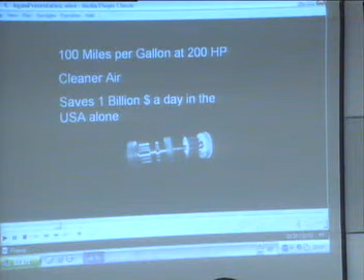Agam's liquid ring rotating casing heat engine: 100 miles per gallon at 200 horsepower. Cleaner air, saving $1 billion a day in the USA alone. Road efficiency of the piston engine has not changed since 1908 and remains at only 10%.

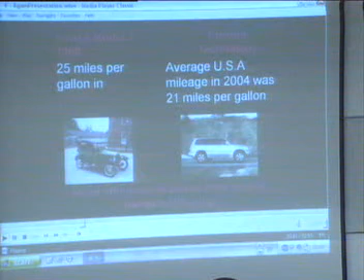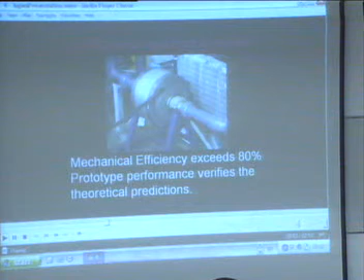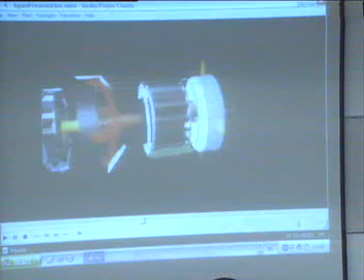The LRRC compressor and turbine are the key elements for new generations of vehicle heat engines. The proof of concept shows that mechanical efficiency exceeds 80%. Compressed cold air on the left is heated by exhaust air on the right before entering the combustion chamber, where its temperature is elevated. Heat is transmitted to the cold air through a thermal liquid pipe connection.

Agam's engine is 5 times more efficient and environmentally friendly. Agam is the future of vehicle engines: 100 miles per gallon at 200 horsepower, in 2012.

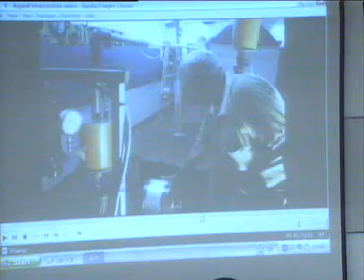Agam heat engine, proof of concept. This is the advanced liquid ring compressor with rotating casing.

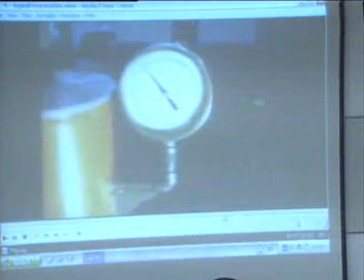The efficiency of this compressor is 82%, compared with 40% for a conventional liquid ring compressor. With 82%, we can build a heat engine with an efficiency of 55%. This is the base for our heat engine.

Agam heat engine is 5 times more efficient than a standard piston engine: 1/5 fuel consumption, 1/10 air pollution.

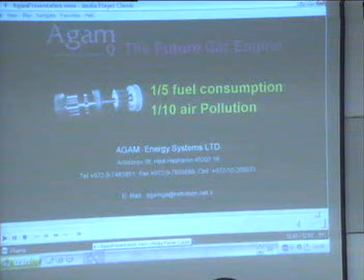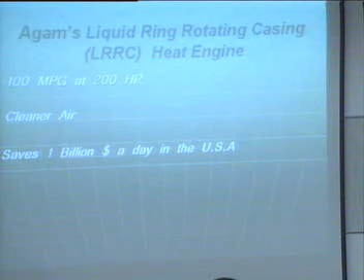Now everybody knows that our compressor is working, and this is the basic innovation for our engine.

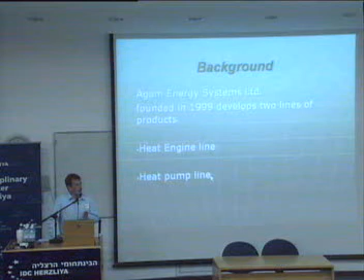A little bit of background: Agam Energy System was founded in 1999 and develops two lines of products, a heat engine line and a heat pump line. I'm going to focus now on the heat engine. You're more than welcome to look at our website for the other line.

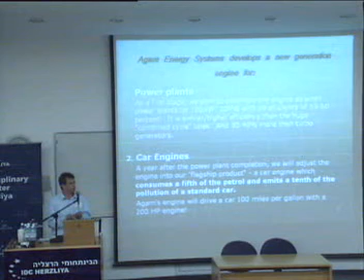We're developing a new type of engine. This engine will be used first for power plants, and the year after the power plant stage, we will put it into a car.

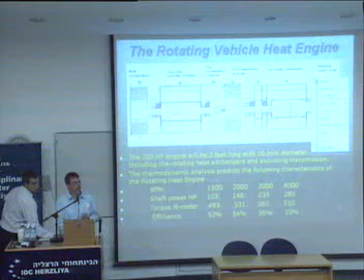You saw it in the movie, but I will focus again on the people behind the innovation, because people say it doesn't matter only what you say, it matters who said it. Dr. Gad Assaf used to be chief scientist at Ormat and Solmat, for those who know it. He has a lot of patents and a lot of scientific papers.

Two weeks ago, the Globes newspaper published an article about us and interviewed Yehuda Bronicki about Gad Assaf. Yehuda Bronicki said Gad Assaf is one of the most innovative minds he's ever met.

This is Gad. Our CEO is Moshe, he's sitting here in the 3rd row, an ex-colonel in the army, in one of the most elite units of the IDF. I will not say which unit, but people can guess.

He was twice awarded the Israeli Defense Award. When we make big claims like this, you need credibility, and we believe these two people have the credibility to back them up.

A little bit technical now. This is a turbine-based engine. These are used in power plants, and we claim that we can do it better.

What we were able to do with the compressor that we all saw and heard about is make this part more efficient than any other compressor. And in the second stage, we're able to cool it at the exit point.

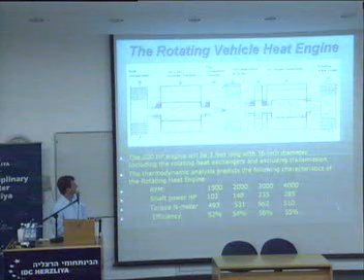I'm not going to talk about it too much, but this is the main principle of our engine. As we said, in the beginning we'll use it for a power plant, but afterward, since we're able to make a 200 horsepower engine at the size of 16 inches, we will put it inside a car.

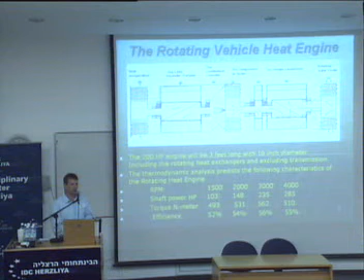For the technical people, you can see the fuel consumption, less pollution, and better performance.

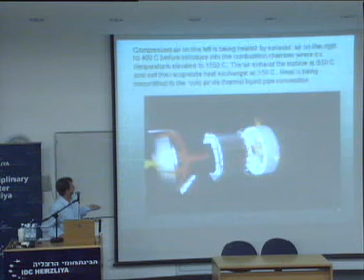Again, big claims - we wanted to make sure we're not just dreamers. We went to one of the world experts in thermodynamics, Professor Yehuda Teitel from Tel Aviv University, and he confirmed in writing that our engine will achieve almost 60% efficiency.

This month, we received an announcement from the Ministry of National Infrastructure that they will support us. They chose us as one of 6 projects they will support in R&D. It's not a large financial support, but it's a very good reference.

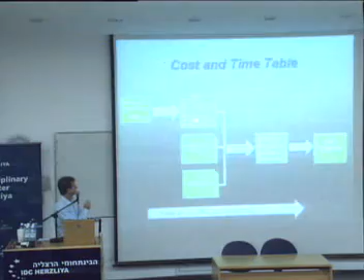Roadmap: we are here. In 18 months, we will complete the second stage of the compressor and the liquid ring turbine, which I didn't focus on in the previous pages, as well as other parts like the heat exchanger. 18 months after that, we will have the small to medium power station.

These power stations have an efficiency of about 60%, which is higher or similar to the big co-generated power plants of the electric company, but achieved in much smaller measurements and infrastructure. Up to this point, we need 3 years and $8 million.

A year after this stage, we will assemble the engine into a car. That will require another year and $12 million. So in total, we're talking about 48 months and $20 million US.

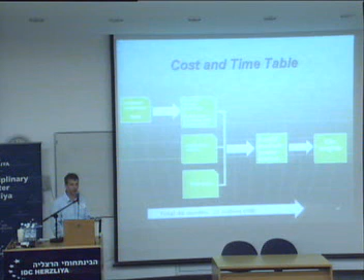It's not a big amount. It's not a big amount. We encourage you, and our friends from overseas, to look at our website and contact us. We need the investment now.

Questions? No questions? Hope it's a good sign.